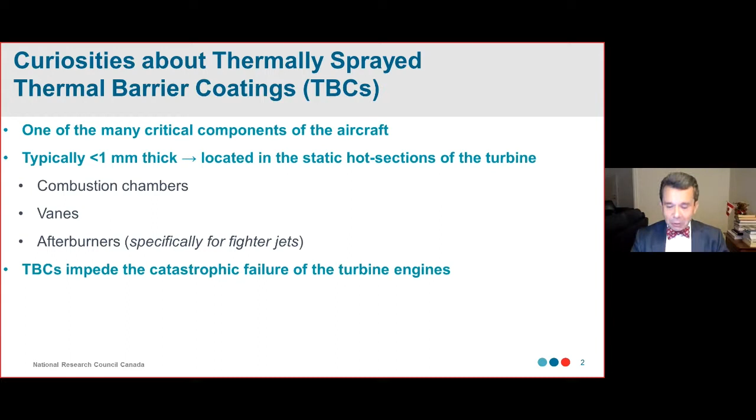When you are flying, mainly when we're taking off, the combustion temperature inside the combustion chamber is higher than the melting point of the metal that is surrounding the combustion chamber. Therefore, that coating, that thin little coating less than 1 millimeter thick, is protecting you against a major disaster. This presentation shows in very simple terms how TBCs work.

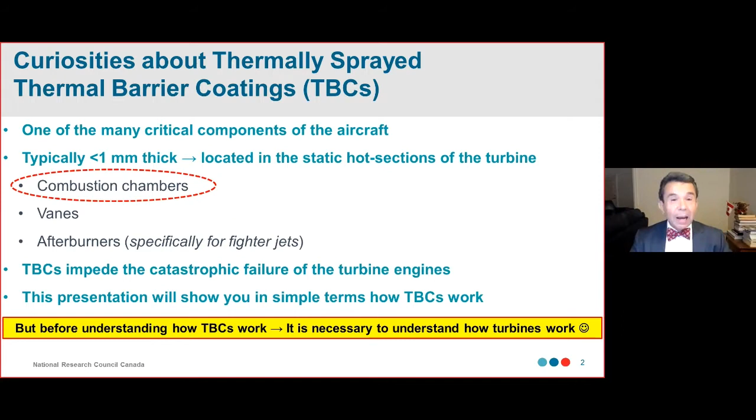I'm going to concentrate the presentation on combustion chambers, on TBCs for combustion chambers. But before we go there, you need to basically understand how jet turbines work. So you're going to have a tutorial movie, 1 minute and 35 seconds, to show you the basics of jet engines. Jet engines 101, let's see how it works.

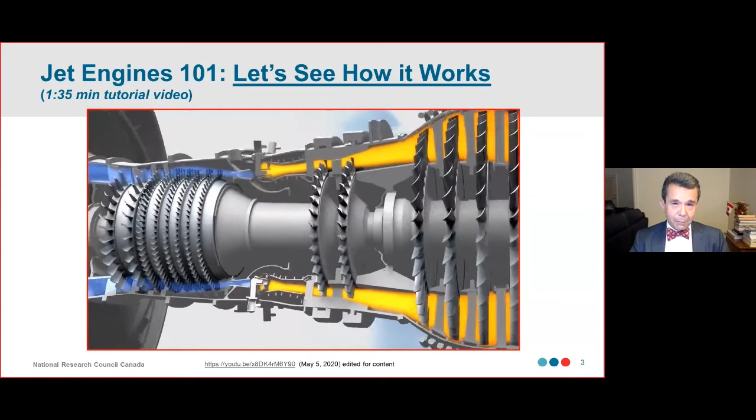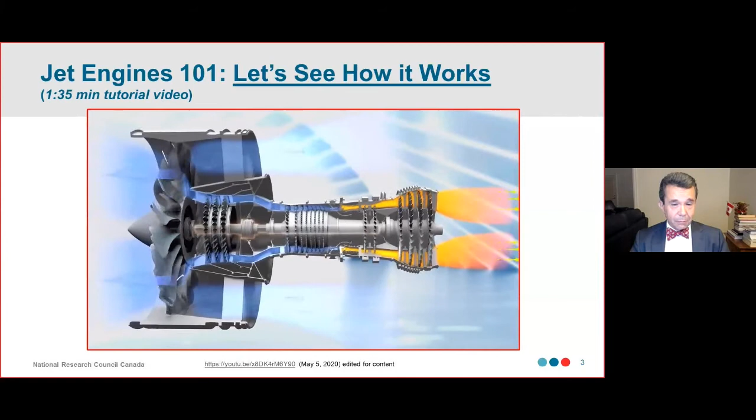The engine pulls air around the engine and sucks air into the core. We'll come back to that outside air in a moment. For now, let's follow the air in the core. It goes into a compressor, something like many household fans joined together. Each fan gets smaller and smaller as the blades squeeze the air into a tighter and tighter space, compressing the air like you would squeeze a balloon, until that squeezed air is mixed with jet fuel, a kind of super gasoline. In the combustor, that air and fuel mixture meets a flame and shoots out the back of the engine. The rush of hot air spins a turbine. The turbine is like a windmill that scoops up energy from the heated air and spins the shaft connected to the fan at the front of the engine. The excess hot air from the combustor blows out the back of the engine, producing thrust.

Remember that air rushing outside the engine core? Together, the turbine and fan push a larger mass of air than the core ever can, for much more thrust.

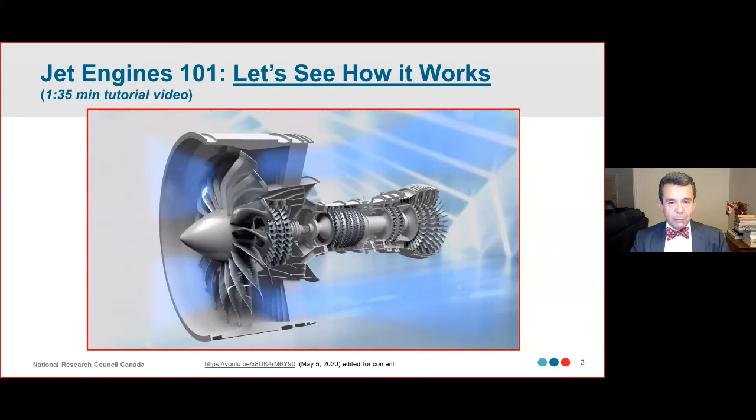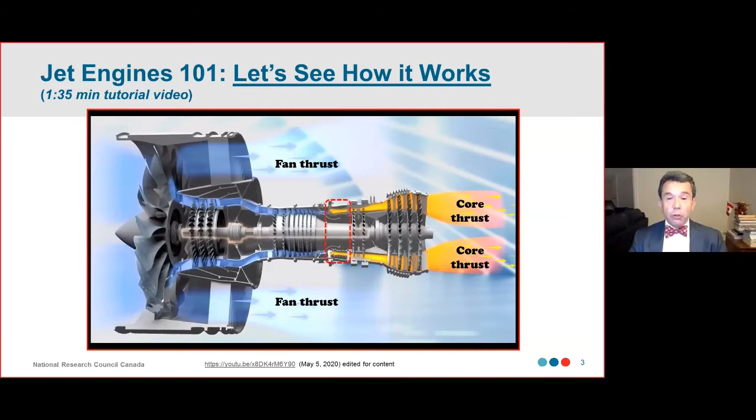So, as you saw in this video, basically you have the turbine engine, and you have two sources of thrust: the core thrust and the fan thrust. But in order to have thrust, you need combustion of the fuel inside the combustion chamber, and there we need the TBC. So let's see the combustion chamber in more detail.

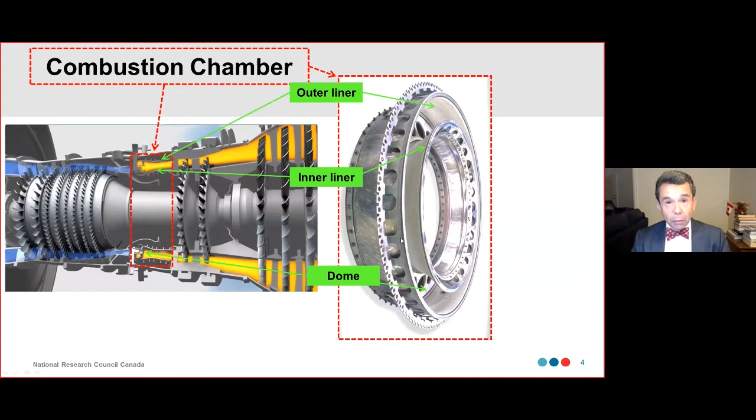So this is the turbine, you can see the combustion chamber, and this is how a combustion chamber looks like. It's called an annular combustion chamber, and it has three main parts: the outer liner, the inner liner, and the dome. And this whitish region here, inside the combustion chamber, is the ceramic TBC.

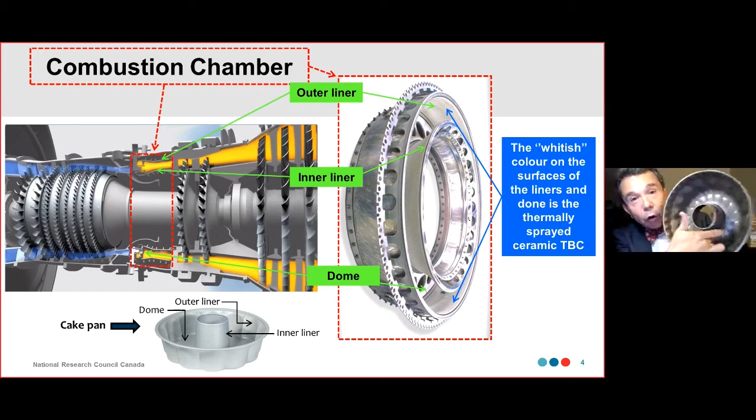By looking at it, some of you may not understand very well how the combustion chamber looks like. But if I show you this, a combustion chamber on an airplane looks basically like a cake pan. Here you have the outer liner, here the inner liner, and here the dome. So if you understand a cake pan, you can understand how a combustion chamber or a turbine looks like.

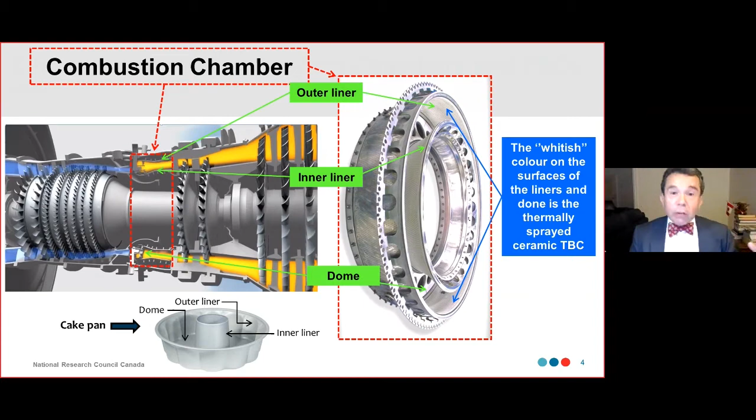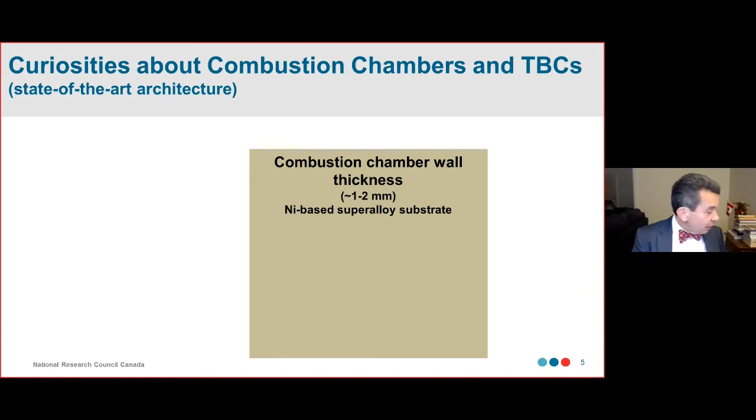So, curiosities about combustion chambers and TBCs: the state-of-the-art architecture of TBCs for combustion chambers. To have an idea, the combustion chamber wall thickness is only 1 to 2 millimeters thick. So when you are flying, this thickness is about 1.5 millimeters - the metal, the nickel-based alloy, has a thickness of only about 1 to 2 millimeters, and you are burning the fuel at high power.

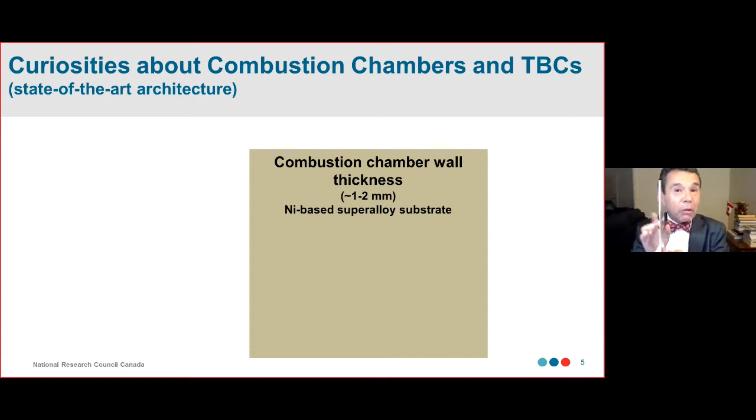Basically, the temperature is higher than the melting point of the material - it's amazing, isn't it? And here, over the combustion chamber wall, you have a bond coat. It's basically a nickel-based alloy, with thickness varying from about 100 to 200 microns, and this coating protects the combustion chamber wall against high temperature oxidation.

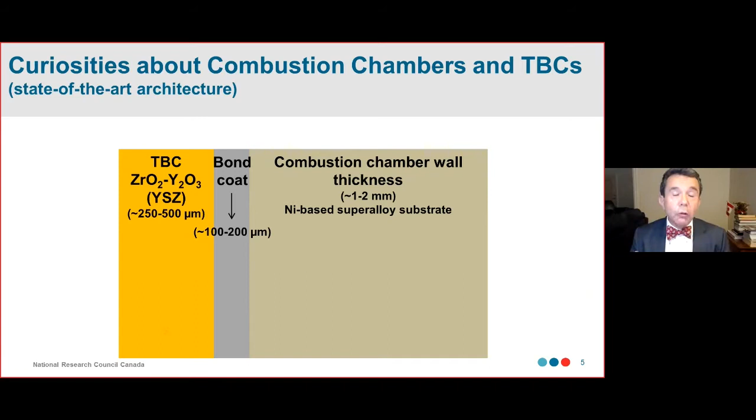And over the bond coat, we have our ceramic TBC. The standard material we use today is zirconia yttria, the standard material for the ceramic TBC, and the acronym is YSZ. So in my presentation, I'm going to say YSZ many times - it's the zirconia yttria, the material of the TBC. The thickness varies from 250 to 500 microns, the porosity varies from 10 to 20%, and the thermal conductivity is from 0.7 to 1 watt per meter Kelvin.

Just to have an idea, the melting point of this material is 2,700 degrees Celsius, while the melting point of the nickel-based alloys is between 1,300 and 1,400 degrees Celsius. So we need a very high temperature material to allow a very high combustion temperature.

And talking about combustion temperature, we know from the film that you have the heat generated by the combustion. What is the maximum limit that TBCs are working at right now? The maximum limit is about 1,300 degrees Celsius that these TBCs are seeing right now.

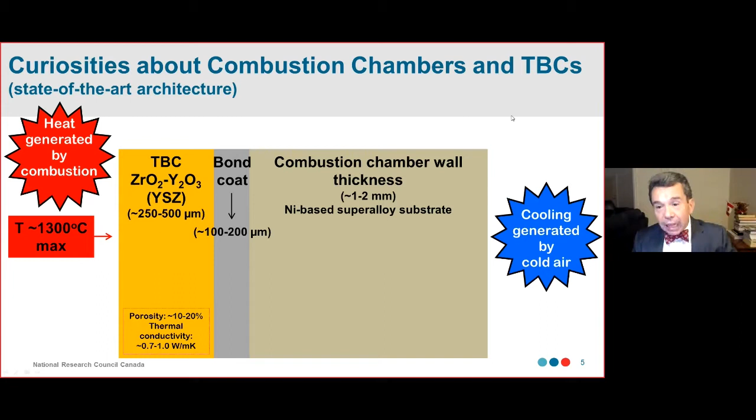In the turbine engine, in the back of the combustion chamber, part of the air from the compressor is bypassed and cools the back of the combustion chamber wall, and the maximum temperature of this wall right now is about 1,000 degrees Celsius. So as you have 1,300 degrees Celsius here and 1,000 here, you have a gradient - a temperature drop, the famous delta T.

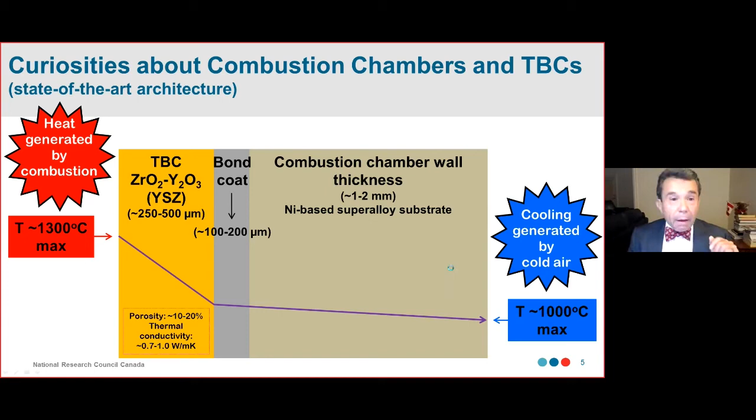Well, basically, this is what you're going to learn from my presentation today. We're going to learn important points, like why the maximum temperature limit of the TBC is 1,300 degrees Celsius, why the maximum temperature of nickel-based alloys is about 1,000 degrees Celsius, why the minimum limit of the TBC is 250 and the maximum is 500, and what are the temperature drops along the TBC system.

Is it 100 degrees Celsius, 300 degrees Celsius, 400? So by the end of my presentation, if you can understand everything, you're going to have a knowledge of the system. So help me God, right?

Before I continue my presentation, some of you are asking this question: how can I spray a TBC inside here, my cake pan, right?

So we're going to see a new movie right now, and it's going to show you a used combustion chamber that's going to be overhauled. The combustion chamber is going to be disassembled, the TBC is going to be stripped off, a new TBC is going to be sprayed again, the combustion chamber is going to be reassembled and shipped back to the client. We're going to see it right now.

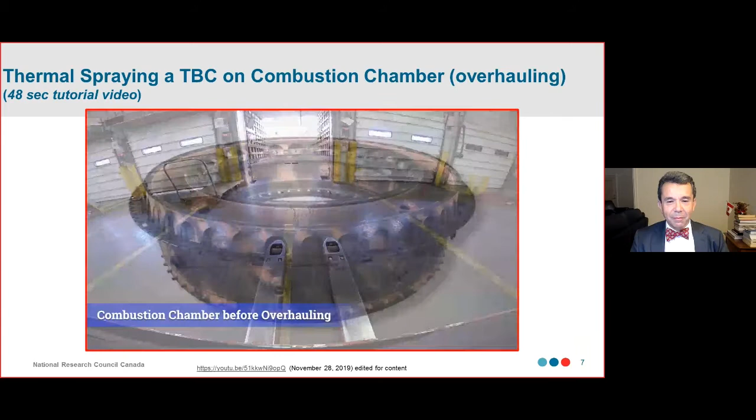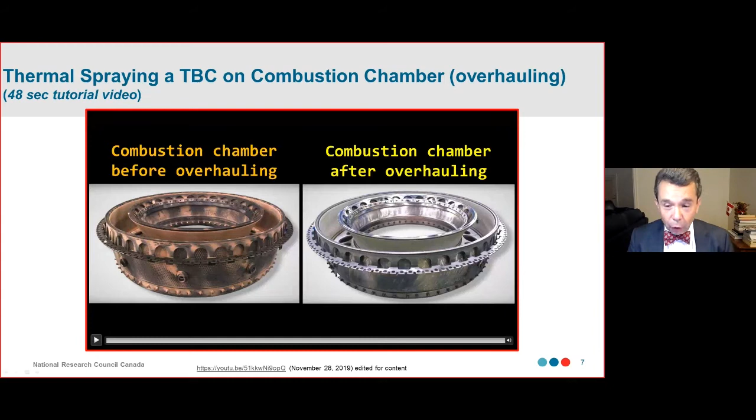So very cool, eh? Okay, the difference between a combustion chamber before overhauling and after overhauling. But, for example, why are TBCs paramount in turbine engines? This is one of the questions I need to answer for you right now.

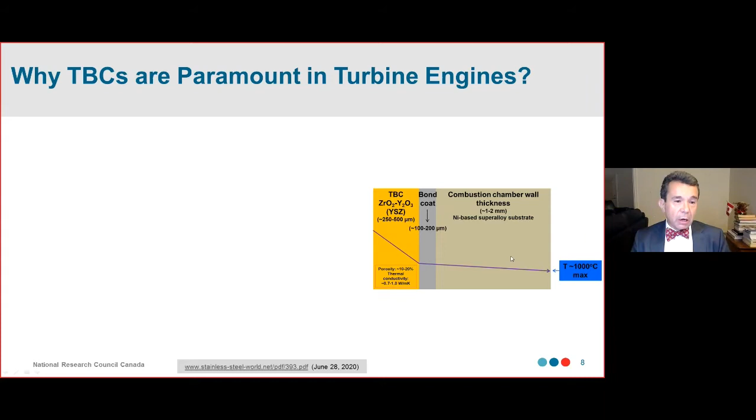As you know, I have been telling you that the maximum temperature that the walls of the combustion chamber, or the nickel-based alloys, can withstand is about 1,000 degrees Celsius. And why is it 1,000 degrees Celsius? Here you can see this graph where you have the onset stress for permanent deformation, or the yield strength, the correct name, and this is the temperature, and these are the different types of nickel-based alloys that are used in turbine engines. Many of you know the concept of yield strength.

I'm going to have a demonstration here with a can of beer, right? So imagine I have here the can and I'm going to apply force. You can see I can deform elastically the can, and when I release the force, basically the can goes back to its original position. So I am working below, under the yield strength of the material.

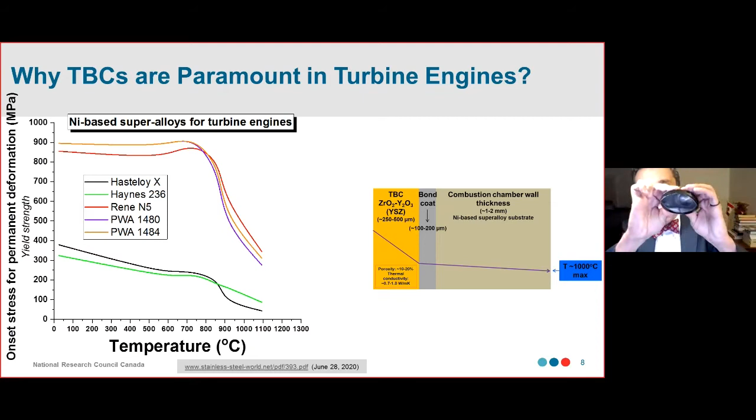However, if I apply enough force, basically I'm going to deform the metal of the can, and therefore I went over the yield strength of the material. So basically, you do not want to have a combustion chamber that's going to be in this way, above the elastic point. And therefore, as you can see in this graph, you can notice that by about 1,000 degrees Celsius, you are very, very close to the limit of a kind of catastrophic failure.

To make a long story short, this is the time where structural engineers are crapping their pants. When we're close to 1,000 degrees Celsius, the structural engineers say don't go over 1,000 degrees Celsius. Basically, in a simplified way, that's why the limit of this material is about 1,000 degrees Celsius today. And you can try to understand...

I have been telling you that the maximum temperature limit of TBCs today is about 1,300 degrees Celsius, right? So imagine if you try to use 1,300 degrees Celsius in here, okay? In very good English, you're going to say, Houston, we have a problem. It's going to be a disaster. And that's why, without TBCs, we're going to have a catastrophic failure of the engine in flight.

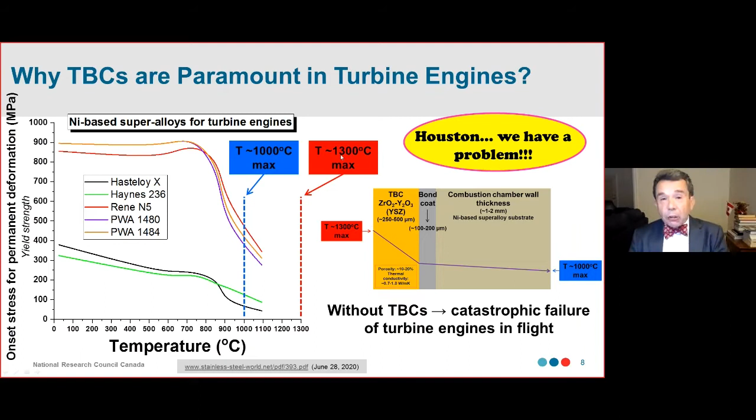Based on that, some of you are going to ask, so why do we have to operate at 1,300? We can keep operating turbines at 1,000 degrees Celsius, don't need TBCs, and we're still in the safe region of the metallic alloys of turbine engines. So why don't you do that? It's not as simple as that, and we're going to understand why in the next slide.

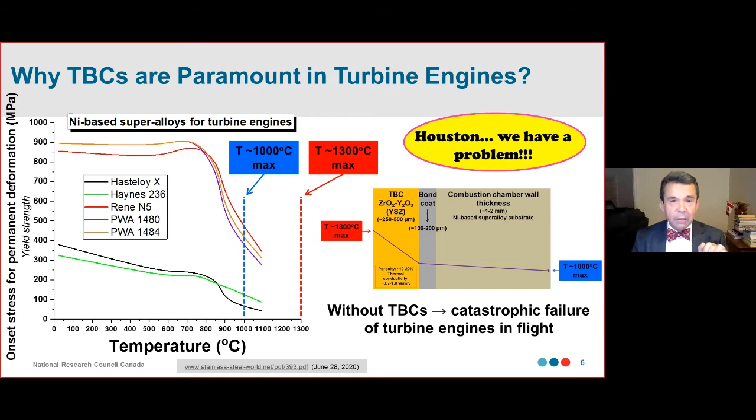So why do we need to keep increasing the combustion temperature of turbine engines? If you see this graph, you can see here the turbine-specific core power versus the turbine inlet temperature. What is turbine inlet temperature? This is the temperature of the gases when they get out of the combustion chamber and they enter the blade region. So this is basically turbine inlet temperature.

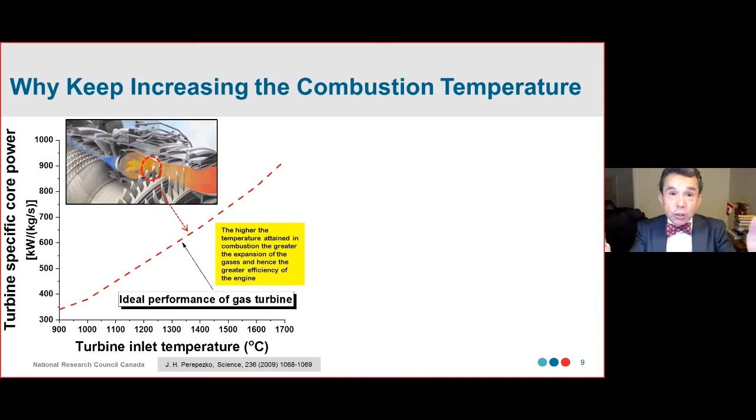And you can see that between 900 degrees Celsius and 1,700 degrees Celsius, this relationship is linear. And why is that? It's very simple: the higher the temperature of the gas inside the combustion chamber, the higher the expansion of the gases, and therefore the greater the efficiency of the engine. That's all.

And you are talking about airplanes. We need lift, so we're making larger and larger airplanes, and we need better and better engines to lift off that big weight. Therefore, you need to keep increasing the combustion temperature.

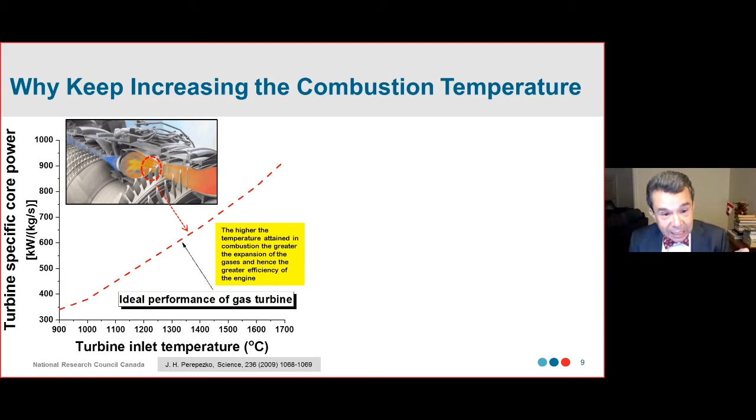Some of you are going to say, okay, now I understand why we need to work at 1,300. But why would not work at 1,400, 1,500, 1,600? Because I can see the graph here is much better.

So why are we limited to 1,300 in TBCs? Basically, the YSZ TBCs start to degrade slowly when the temperature is higher than 1,300 degrees Celsius. You have adverse chemical reactions, phase transformations, sintering, stiffening, and it leads to the failure of the TBCs. That's why we are limited to this value of 1,300 degrees Celsius right now.

So how can we simulate this environment? Because we need to study these TBCs, right? How can you simulate this thermal gradient within TBCs? Well, there are different types of systems you can use.

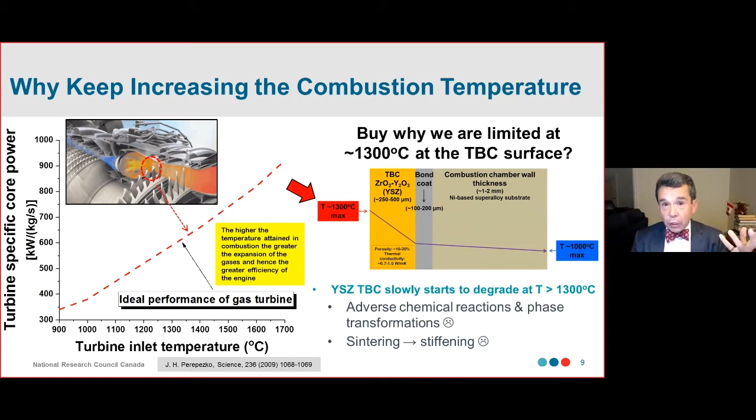It's called the laser rig. The NRC has one. It's a system to generate, to simulate this thermal gradient. And it looks like this system in here.

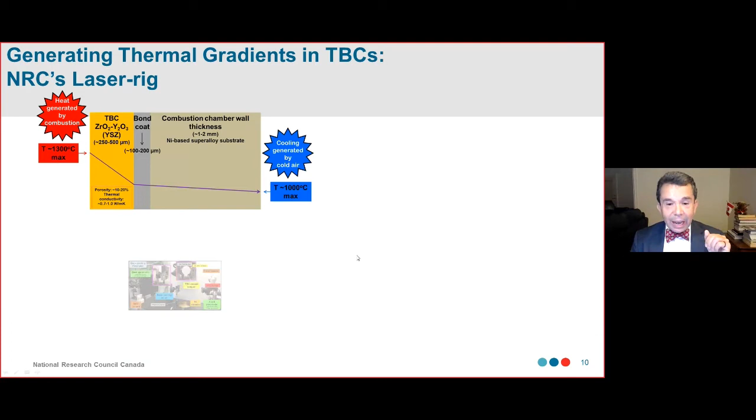Basically you have a substrate, a puck-shaped substrate, 25 millimeters in diameter, 3.2 millimeters in thickness, and we insert a thermocouple inside the substrate, and here you coat the TBC. So this guy in here is this guy in here, is this guy in here.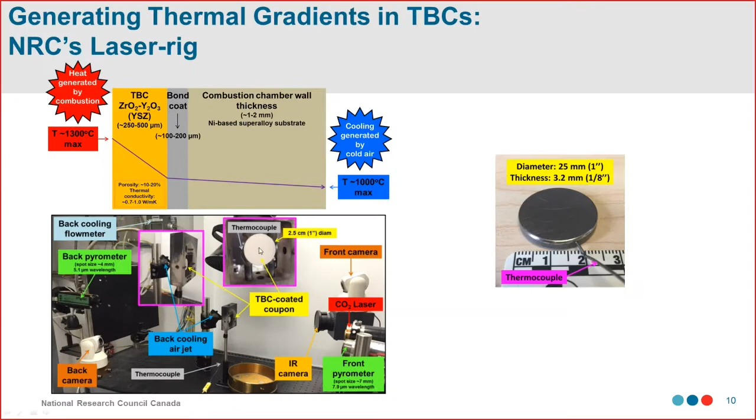For example, we have the TBC, and you put it in the rig, and in the rig we have a laser, and the laser shines on the sample, an infrared laser, and it heats up the sample. You can see in this movie, we have the sample here coated with TBC, and when you apply the infrared laser, basically you heat up the system, it will generate high temperature, and will simulate this part here with thermal gradient.

And here, when you look at this picture, you can see there is a nozzle in here. This nozzle will have compressed air at room temperature that keeps flowing over the backside of the substrate. This backflow on the backside of the substrate basically starts to cool the system. By doing this, we generate a thermal gradient and we can study TBCs.

Basically how we study them: we measure the temperature of the YSZ or ceramic TBC using a pyrometer, and you measure the temperature of the substrate using this thermocouple here. This distance here is about 1.6 millimeters.

And I have been telling you that the thickness of these walls are between 1 to 2 millimeters. So if we're measuring the temperature at 1.6 millimeters, it's basically the average of the thickness of these combustion chamber walls. So it's a good representation of the real system.

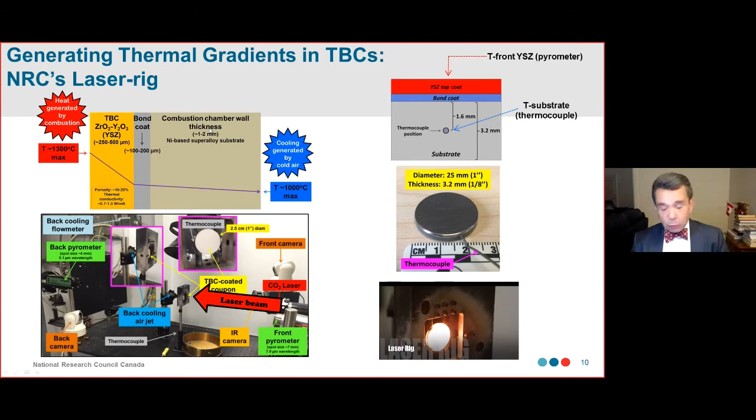So how can we maintain the thermal gradient in the laser rig? You have to generate the heat and you have to generate the cooling. So what we do, basically we have a constant back cooling at room temperature. We have this nozzle here, so we have compressed air, room temperature, cooling all the time.

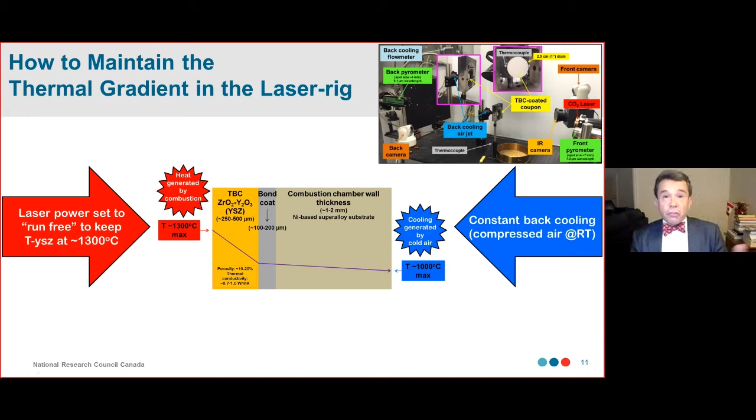And the laser here, basically we tell the system, it's a computer-controlled system with a laser rig. Laser rig, please keep this temperature of the YSZ TBC at 1,300 degrees Celsius. Basically, based on the measurements via the pyrometer, the laser rig is going to adjust its power to keep this temperature at 1,300 degrees Celsius.

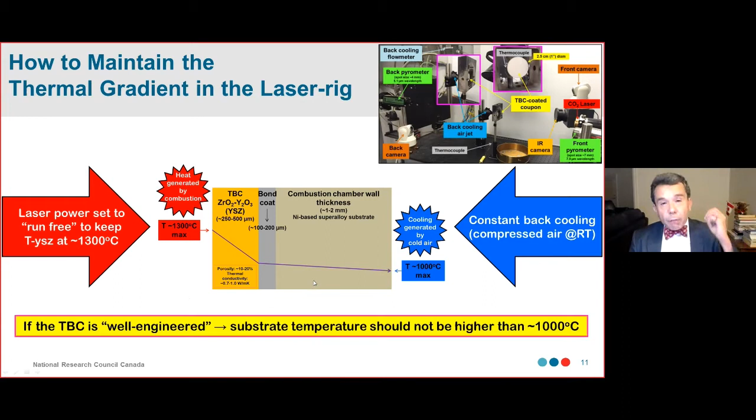And this way, we are going to generate a thermal gradient. So if we make a good TBC and you put the TBC in the laser rig, if the TBC is well engineered, the substrate temperature should not be higher than 1,000 degrees Celsius. It's the maximum temperature that the substrate can handle.

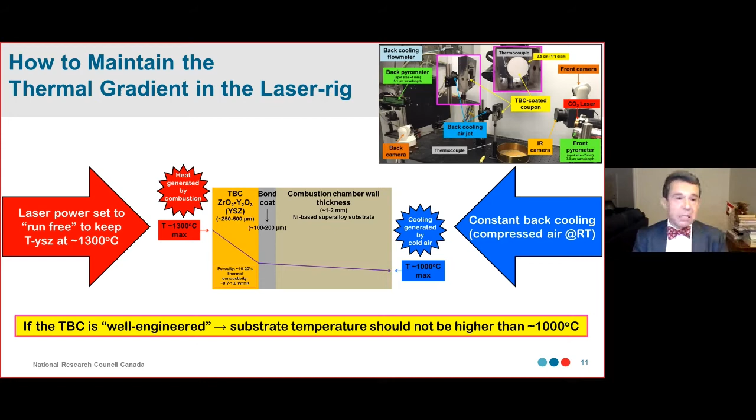So in order to test the TBC, we also have to make the TBC. This is, for example, our standard TBC or benchmark TBC that we created in NRC. We're going to use a plasma spray torch to make the TBC. As you know, I have been telling you that the minimum thickness is about 250 microns, and the maximum limit is about 500 microns.

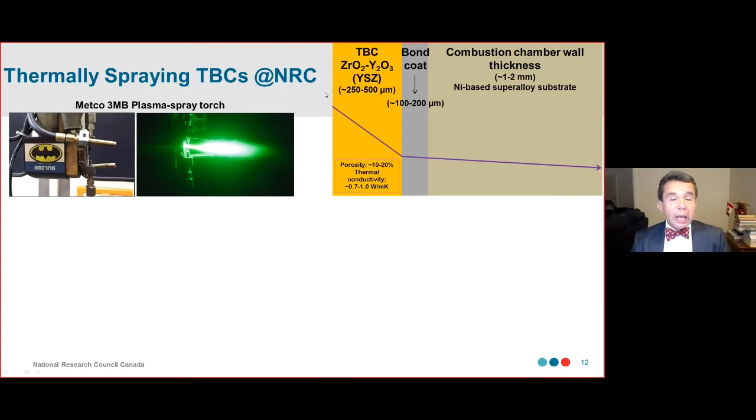So initially, I'm going to make a thinner TBC. It has a thickness of about 260. And then you have to make the same TBC but thicker. So make another one that's thicker, about 460, almost at the upper limit here.

I have been telling you that the porosity of these TBCs is between 10 to 20%, and the porosity of our TBC is 15%, so we're inside the limit. Also, the thermal conductivity of these TBCs is between 0.7 to 1 watt per meter Kelvin, and the thermal conductivity of this TBC is 0.8. So we're right at the good point of having a representative TBC.

Right now we have to get these TBCs at 250, 260, and 460 and put them in the laser rig. Let's see how it behaves. Let's see, for example, what happens when the thickness of the TBC is 260.

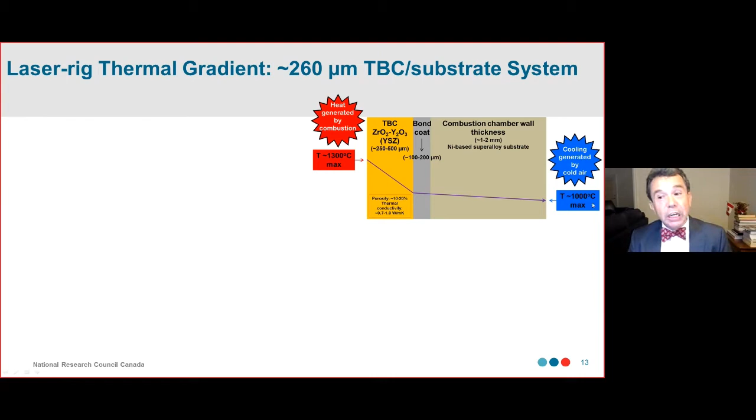This temperature here should be around 1,300. This temperature here cannot be higher than 1,000 degrees Celsius. Let's see if we can achieve that. And this is the graph.

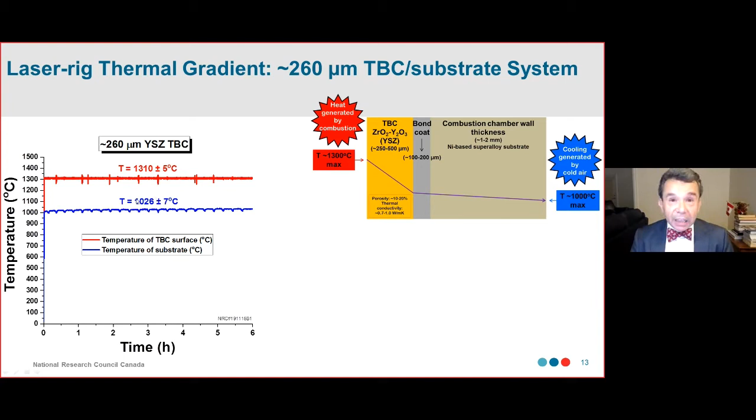During 6 hours continuous non-stop, we were able to keep the temperature of the YSZ above around 1,300 degrees Celsius, this limit here. And we were able to keep the temperature of the substrate around 1,000 degrees Celsius, with this limit here. So it's okay. So the delta T we create in the laboratory is 280 degrees Celsius.

So this is the TBC really working. Because at this temperature, if we didn't have the TBC, this matter would just be goo. So this is really the TBC working.

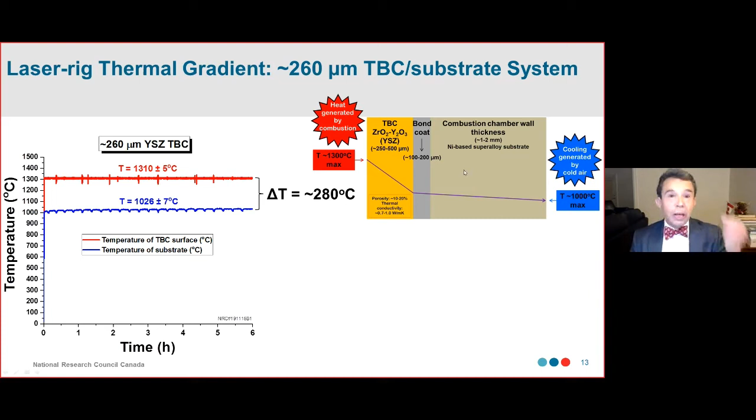As you can see, if the minimum thickness of the TBC, or the YSZ TBC, is 250, the maximum limit of 1,000 degrees Celsius is respected. It means the aircraft is safe to fly.

But also, you can imagine if the thickness instead of 260 was, for example, 160. In this case, you can foresee that the temperature on the substrate would be much higher than 1,000 degrees Celsius, and therefore the system would fail. This is the reason why you need a thickness of at least 250, to guarantee that the temperature of the substrate will be about 1,000 degrees Celsius.

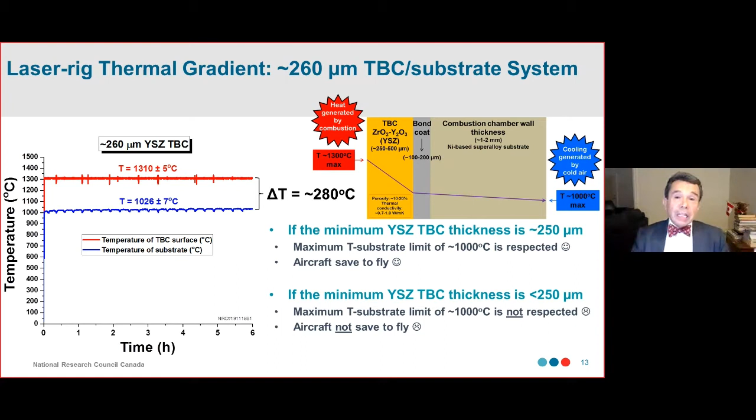So if the thickness of the TBC is less than 250, like 150 microns, basically the limit is not going to be respected and the aircraft is not safe to fly. Let's see what happens in the other way. So here, for example, I'm going to put the other extreme.

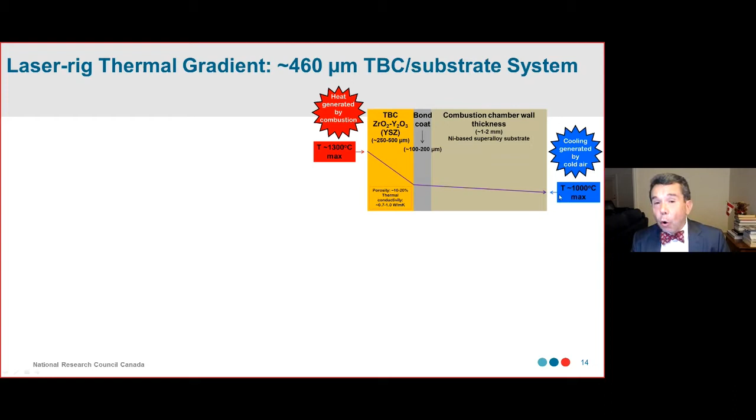A 460 micron thick TBC. This temperature here should be around 1,300 degrees Celsius, and the temperature here cannot go over 1,000 degrees Celsius. Let's see how it works. You can see the graph.

So we performed the experiment for 6 hours, okay, and we did it. The temperature over the surface of the TBC was about 1,300 degrees Celsius, right there. And the temperature of the substrate was about 844. So we have a gradient of 460 degrees Celsius.

So you have a much thicker coating, right? So if the maximum thickness of the TBC is about 500 microns... sorry, the maximum substrate limit of 1,000 degrees Celsius is also respected. So the aircraft is safe to fly.

And of course we can say that for these TBCs, a thickness between 400 and 500 microns is preferred, because basically we put the substrate at a very comfortable limit, well below the limit of 1000 degrees Celsius. And that's why these thicknesses are preferred.

And based on that, you can say why we're not using an 800 micron thick coating. Because even at about 460, we're really protecting the substrate. And if you try to put a much thicker coating like 800 microns, you are basically adding weight to the turbine, and you do not want to do this.

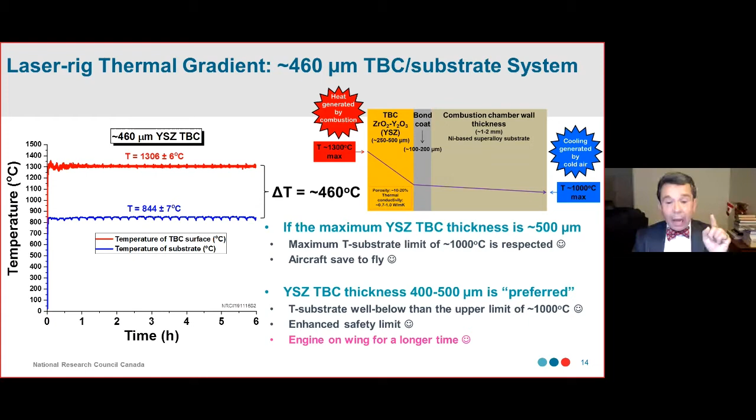So when you have a TBC in which the thickness is about 400 to 500 microns, you have an enhanced safety limit. It means the engine is going to be on wing, so the turbine is going to be on the wing for a long time. And this is really, really important. And why? For example, I'm going to show a concept called hot section inspection.

So basically, when you go to a doctor for your annual checkup, the doctor is going to ask for a blood test, right? So this is a standard test.

And the blood test, so for a turbine, when a turbine goes to the mechanic, it's the hot section inspection. Basically, we're going to use a borescope and analyze to see if the TBC is still there. So we're going to use a borescope and look at the TBCs. If the TBCs are still there, it means the engine keeps flying. So it's a good engine, it can keep flying.

It's the same thing as if you go to the doctor and have your blood test. If your blood test is good, the doctor says you're okay, go back next year. However, if the TBC shows signs of spallation, the engine needs to be repaired. It means this is not good because the engine needs to stop flying.

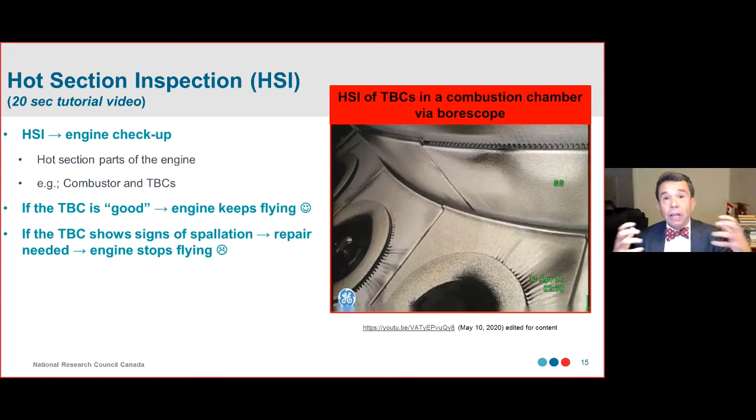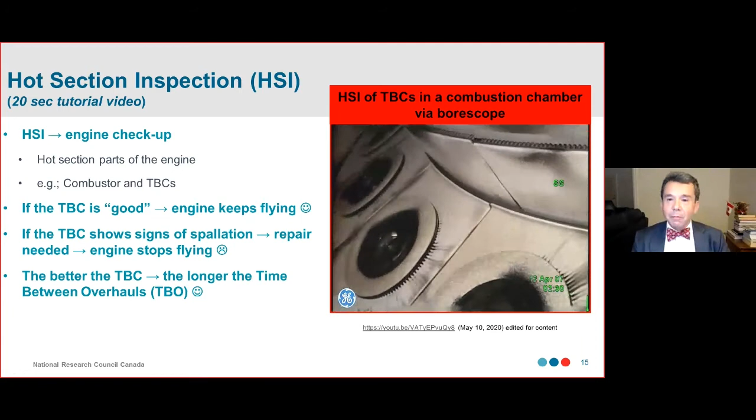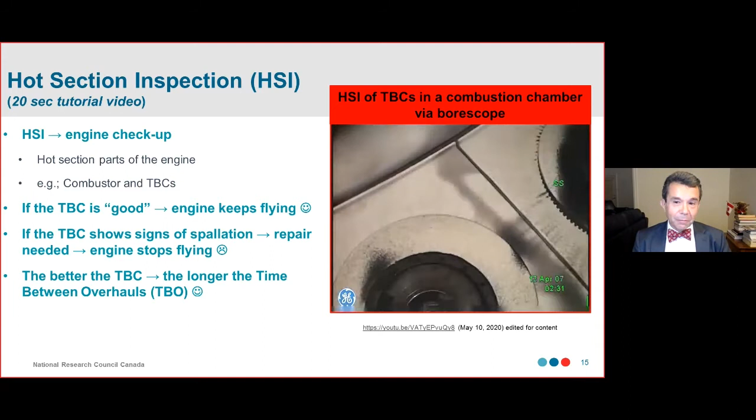So as you can see from the video, basically the TBC is intact. There are no signs of spallation. It means that this engine is going to keep flying.

And it's important because if a turbine is going to fail, it's probably going to start failing at the TBCs. Why? Because this is the region where you have the highest temperature and highest stresses in the engine. And that's why it's very important for companies to keep analyzing the TBCs.

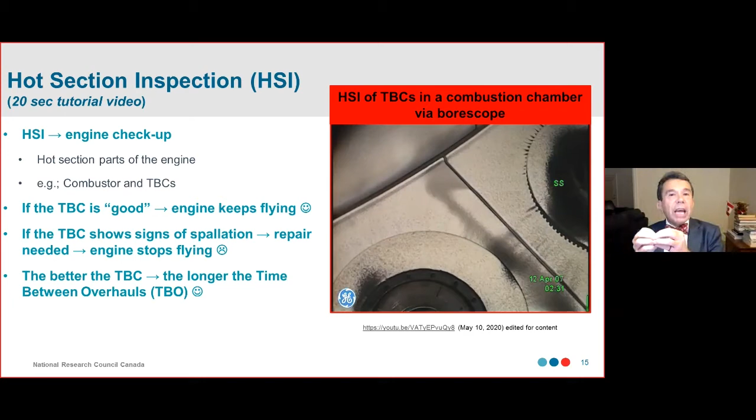So it means the better the TBC, the longer the time between overhauls. The time between overhauls, the TBO, is basically how many hours a turbine can run without having to go through an overhaul. And the quality of the TBC is very important to keep improving the TBO. And based on that, how long can these turbines fly? It's a good question.

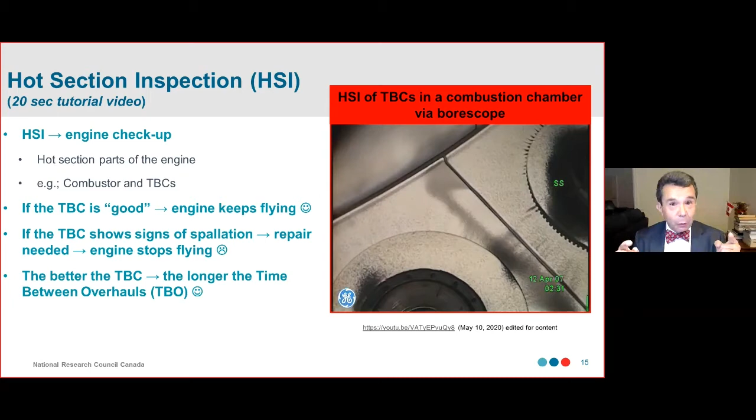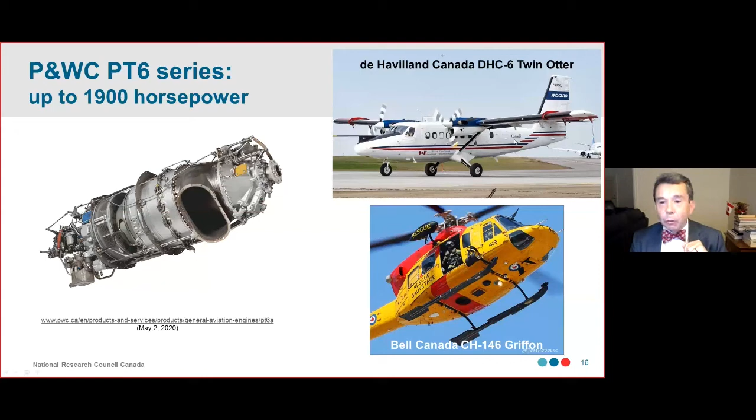I'm going to show you some examples. For example, the Pratt & Whitney Canada PT6 series, which powers aircraft like the de Havilland Canada Twin Otter and the Bell Canada Griffon, is going to fly for 6,000 hours. It's not a guarantee, but this is the type of limit that the company gives to the engine.

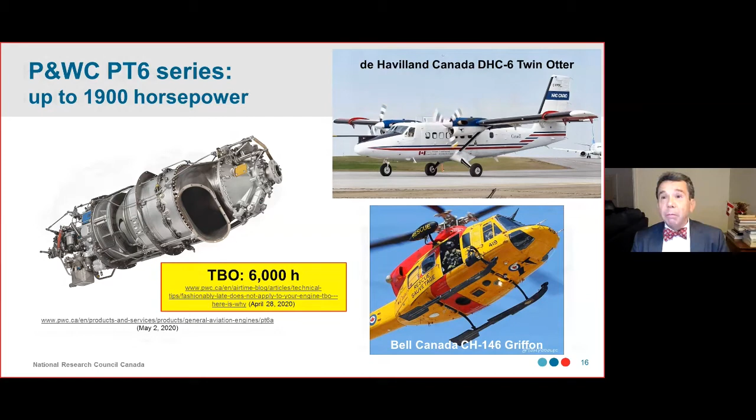So how about, for example, the Pratt & Whitney Canada 100 series? It powers aircraft like the Viking Canadair and the de Havilland Canada Dash-8. So it's 8,000 hours flying in good conditions. It's a good amount of time.

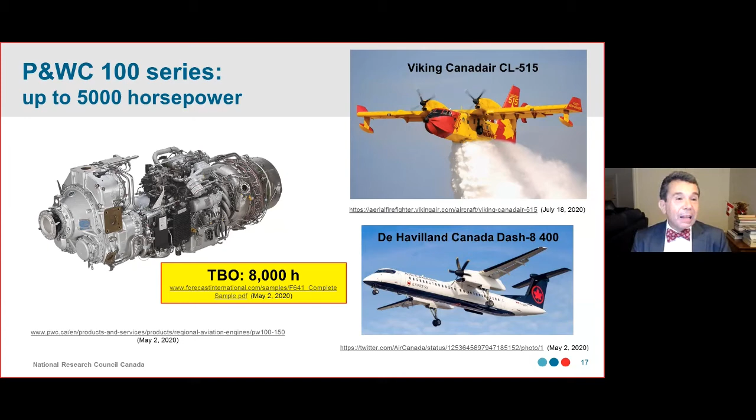And the Pratt & Whitney Canada 800 series powers the Dassault Falcon 6X. This engine is also considered the upgrade for the Boeing B-52. It's 10,000 hours of flight.

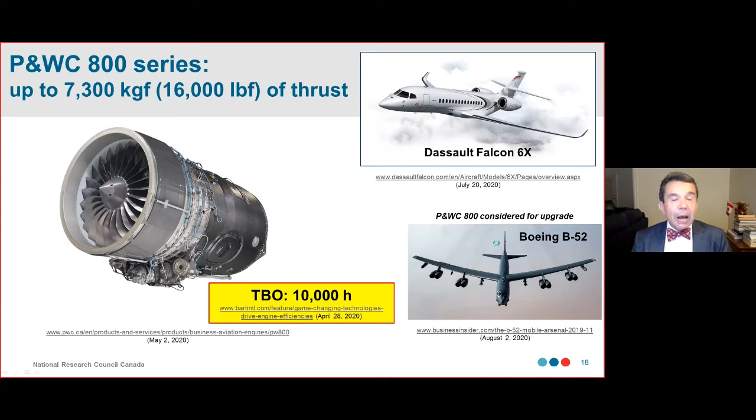And how about, for example, the big guys? Just like the GE90 series, which powers big aircraft like the Boeing 777. It's 20,000 hours of flight. It's amazing, that TBO, right? It's huge.

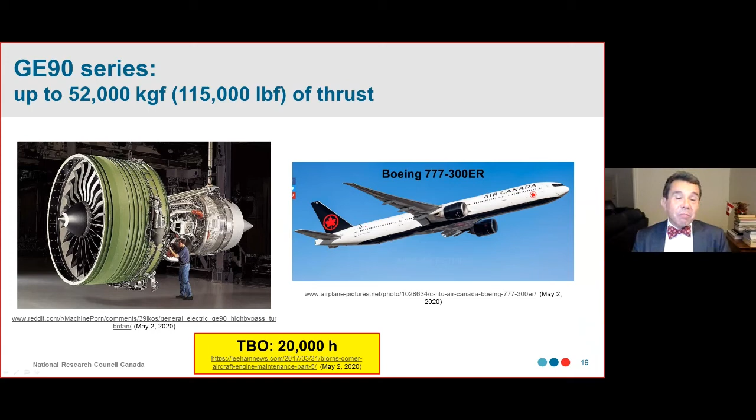And how about fighter jets? Like the Saab Gripen E, a very modern engine, the GE F414, it's 6,000 hours. It's not too much because fighter jet engines are always operating at the limit. That's why they typically don't last very long.

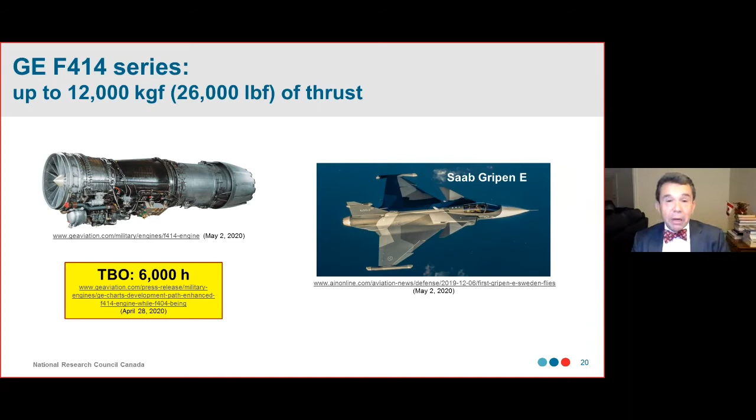So as I was telling you, having a good TBC is very important to increase the time between overhauls of an engine.

And sometimes, for example, you have the inspection, the boroscope you saw in the movie, and you find zones of spallation, tiny zones of TBC spallation. You need to remove the combustion chamber from the engine. It means the aircraft is not going to fly, so we have to remove the combustion chamber, ship it, and the combustion chamber has to be resprayed and shipped back to the client. It takes a lot of time.

And that's why some companies right now are thinking about how it's possible to repair a TBC, I mean some little zones of spallation, with TBC in loco, on wing, when the turbine is on the aircraft. So without taking the combustion chamber off the turbine, you have to do a thermal spray with a tiny little torch in a very localized zone. And for many thermal spray experts, they think it's mission impossible, right? So let's see if it's really mission impossible. Let's see how we may be able to do this in this movie.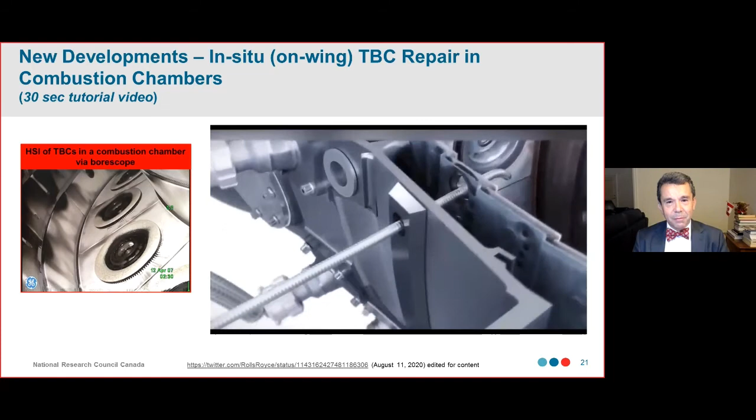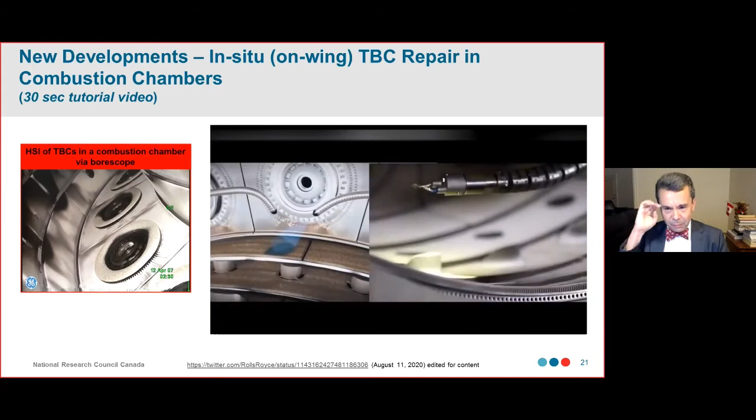So, that Rolls-Royce is trying to do this for sure, for example, is something amazing. So end-to-end, basically, final comments.

Thermal spray TBCs are paramount for the aircraft industry. They prevent catastrophic failure of jet engines in flight, and help increase engine efficiency and longevity. There are two major axes of TBC R&D today: people are trying to increase the manufacturing efficiency of TBCs and the longevity of the current YSZ TBCs, and also develop new TBC materials that can operate at temperatures higher than 1,300 degrees Celsius. Both axes of research are present in our Surftec consortium of the NRC.

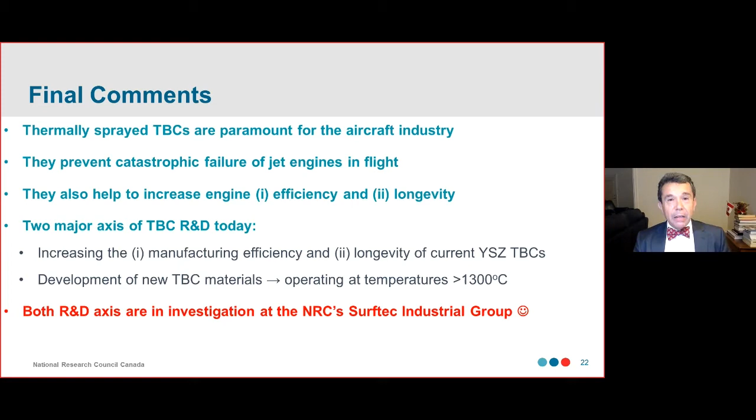If you enjoyed my presentation and want more information, by a nice coincidence, the paper version of this presentation was published on August 22nd, basically two weeks ago. It's in a special issue of the Coatings Journal, Recent Developments of Thermal Barrier Coatings. The guest editor is Dr. Nicholas Curry, a rising star in our thermal spray community. This is an open access journal, so if you click on this website, you'll be able to download the paper for free. At the end of my presentation, Vesna is going to send you this web link via email, so if you want a copy of the paper to better understand today's presentation, you'll be able to get it.

Acknowledgements: thank you to the NRC technical officers - David De Lagrave for editing the movies you saw today and for metallographic preparation of the TBC samples, Karine Théberge for the SEM pictures, and Jean-Claude Tremblay for APS TBC manufacturing and laser rig operation. Thank you very much, merci beaucoup, and I hope you have enjoyed my presentation.

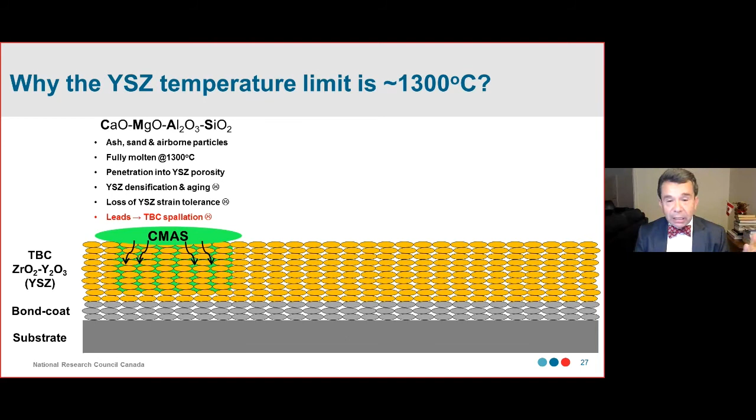And therefore, for example, we have the YSZ, densification and aging. We have loss of strain tolerance because you have a glass inside the TBC, so you are cycling, turning on and turning off the engine, and therefore the TBC is losing that capacity of having strain tolerance, and you have the TBC spallation.

Concerning phase transformations, typically for TBC, after, for example, 1300 degrees Celsius, the T prime phase - so I'm going to be a little bit technical right now - the T prime phase is going to transform into the regular tetragonal and the cubic phase. So when you have the regular tetragonal and, for example, the temperature goes from operation temperature to room temperature, you have the formation of the monoclinic phase.

When you have the monoclinic phase, you have a volume change. So the monoclinic phase, when you transform from tetragonal to monoclinic, you increase the size of the phase, right? So it's about 3 to 5% in volume.

And therefore, as ceramics, you have lack of plasticity, okay? The only way to release stress is via microcracking. So if you have microcracking, what's going to happen is you have the loss of mechanical strength. So when you have any type of phase transformations in ceramics, at low temperatures the way to release stresses is via microcracking, and therefore you lose mechanical strength, and this leads to TBC spallation.

Finally, for example, sintering: the higher the temperature, the higher the sintering, and we're going to have YSZ densification. It's going to densify the YSZ, and we're going to have a higher thermal conductivity for the TBC, meaning the thermal barrier effectiveness is going to go down, and it leads to TBC spallation. So I hope I was able at least to reply or to address part of your question.

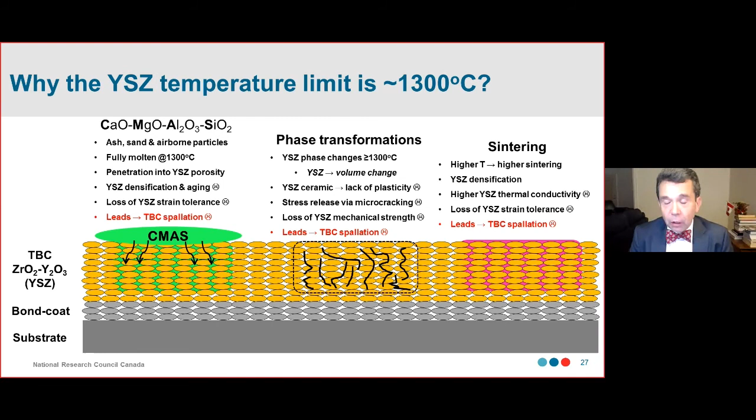For the ceramic TBC, you want to create porosity, so if you want porosity, I would not use vacuum. I'd prefer to use, for example, regular air plasma spray. One good thing about using nitrogen is that you generate a lot of enthalpy in that plasma, which lets us increase the deposition efficiency of the TBC significantly, reducing production cost. At the NRC, the way we spray our benchmark TBCs, we use a nitrogen plasma spray. But I would not use vacuum to spray the ceramic TBC, because that tends to make a very dense coating. You need that process to create a kind of Swiss cheese structure, giving the TBC its capacity to withstand the cycling you have when operating in a turbine engine.

Min has a question about surface roughness - are the coatings used in the as-sprayed condition, or would any polishing of the surface give aerodynamic benefits? In some cases, yes, depending on the region, mainly for the blades, you may do some polishing to improve aerodynamic performance. It's not mandatory, but it's done in some cases to improve the aerodynamic performance of the surface.

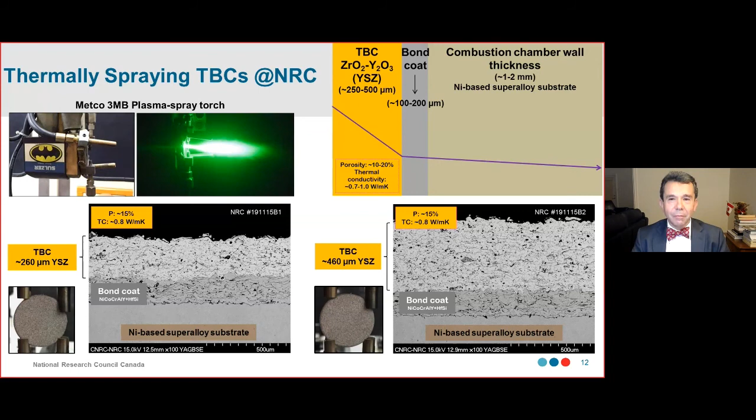Okay, so we're going to get down to the final question here. Peter has a very interesting question, a very searching question. And then I'm going to ask you to have some closing comments, Rogerio, and then ask Vesna to get ready to present the final slide for the audience. So here's the question from Peter: what do you think, this is the million dollar question, are the knowledge gaps in TBC development?

This is a very nice question. When you look at the literature on TBCs, on the ceramic coatings, the papers in general tend to show the same trend on the ceramic coatings. But when you look at the papers on bond coats, the results can be totally different because you have so many effects happening in the bond coat. Sometimes, for example, paper A and paper B have very, very different effects. So that's why we need to know more information about bond coats.

It's a very important thing because we are seeing different results from different authors. Some authors - there is a big truism in thermal spray and TBCs that the vacuum plasma spray bond coats are the best ones. But different authors, including papers from NRC, were showing that it's not necessarily the same. So bond coat development, for me, is a kind of gap where you need to know more information.